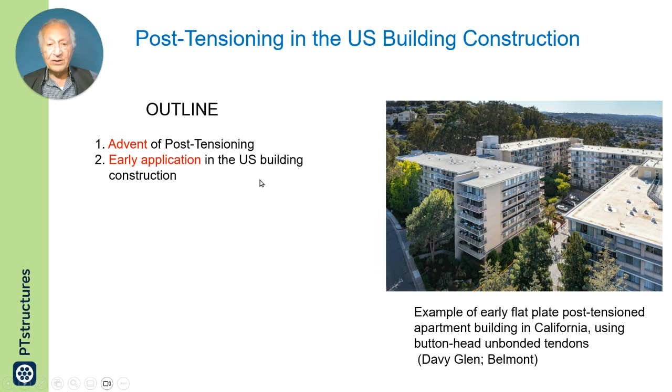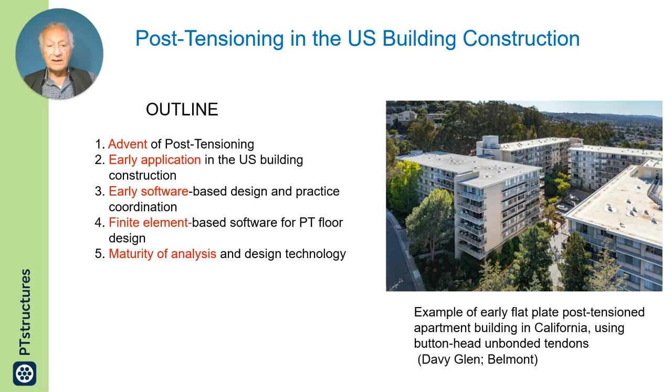Now I will start by giving you an outline of post-tensioning: the advent of post-tensioning worldwide, early application in the U.S. building construction, early software-based design, because I believe availability of software helped greatly in the growth of post-tensioning, then the finite element approach to design of post-tensioned structures, and the maturity in design and construction.

The advent of post-tensioning is attributed to Doehring in 1888, who obtained a patent in Germany for pre-stressing slabs and used metal wires. The objective at the time was control of cracking.

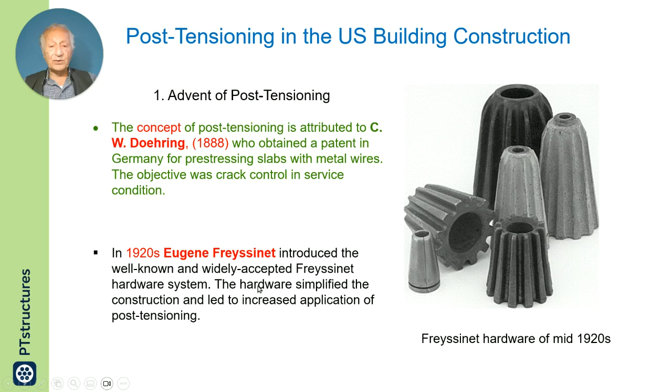In the 1920s, Freyssinet introduced the well-known and widely accepted Freyssinet hardware, shown partly on the right. The hardware simplified construction and led to increased application of post-tensioning.

Now, the design of post-tensioning was very different then. It is also very different today from the European style. Then the focus of application was in bridge construction, heavy structures, and the reduction of tension stresses, or avoiding tension stresses in the extreme fiber.

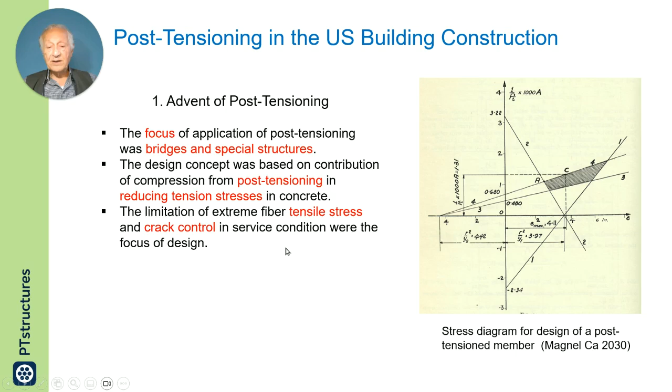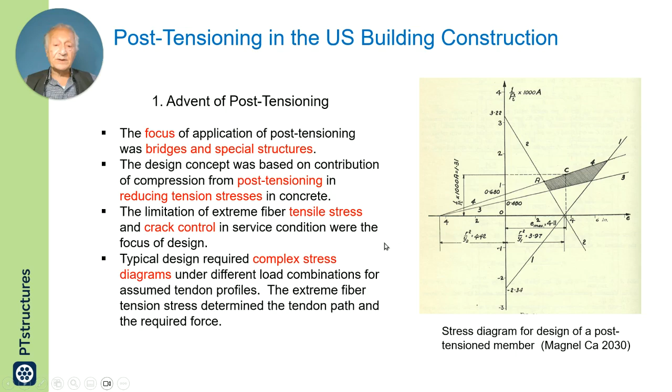Target was crack control. Extreme fiber stresses were calculated under different loading conditions and tendon profiles.

Early application in the US, however, is different. Not much happened, neither in concept nor in design procedure, between 1920 and the mid-1950s. In the mid-1950s, innovative building contractors in the US used pre-stressing strands and rods in flat slab construction to control deflection and cracking for thin concrete slabs.

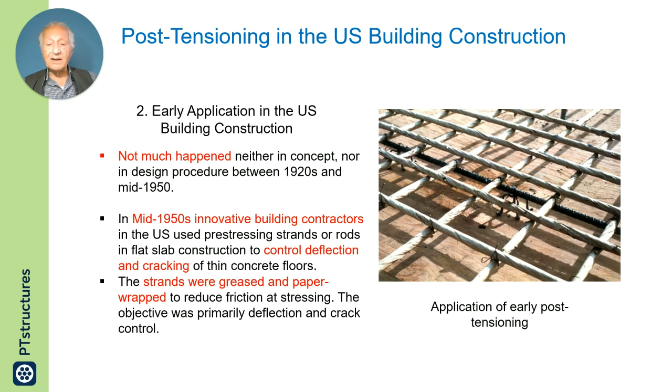The strands were greased and paper wrapped to reduce friction at stressing. The objective was deflection control, and to some extent cracking, but primarily deflection control. What you see on the right is an example of early construction where the tendon, the pre-stressing steel, is greased and paper wrapped.

The construction technology, in concept and application, widely differed from the European-based practice, very different. The US application was the introduction of unbonded construction technology, as opposed to the European practice, which was based on grouted post-tensioning.

In the European grouted system, the void between the pre-stressing steel and its conduit, subsequent to stressing, was filled with grout. The US practice was mostly focused on thin slabs, unlike the European practice, where heavy members were the target of post-tensioning.

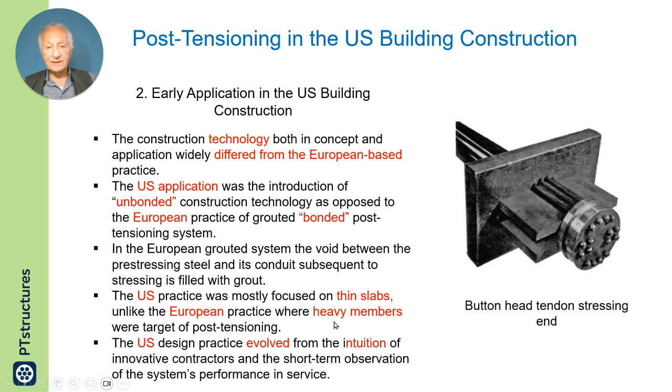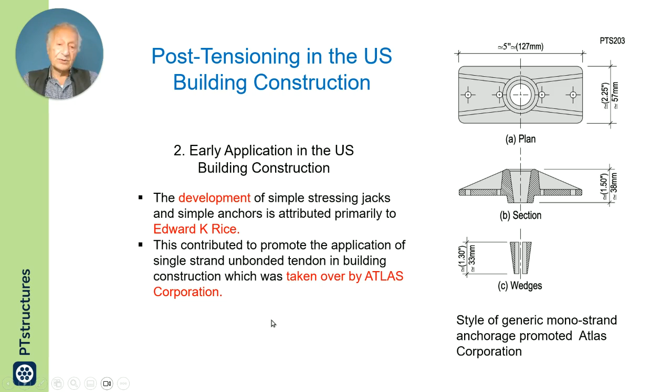The development of simple stressing jacks and simple anchors, as shown on the right, attributed to Edward Rice, helped simplify the construction and growth of its application. This contributed to promote the application of single-strand unbonded tendons. The design was later taken over by Atlas Corporation in California, that helped greatly in expansion and promotion.

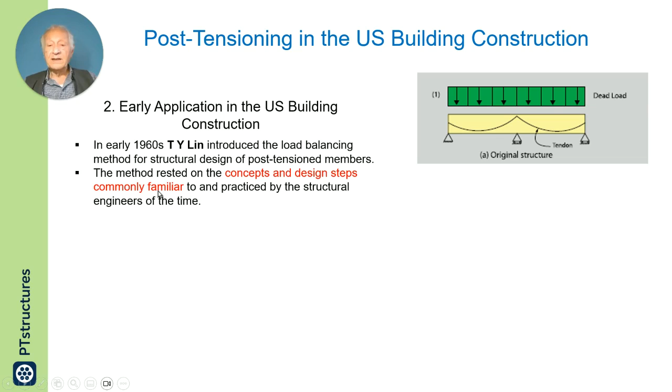In the early 60s, T.Y. Lin introduced the load balancing method for structural design of post-tensioned members. Now, the load balancing method, the concept and design of the structure, rested on commonly familiar concepts that structural engineers knew.

The load balancing method introduced by T.Y. Lin viewed the pre-stressing as an upward force, similar but opposing to the member's self-weight. If this is the post-tensioned member, this tendon was viewed to apply an upward force, as I have shown here, to counteract the weight of the structure, and that force obviously included downward components as well as axial forces.

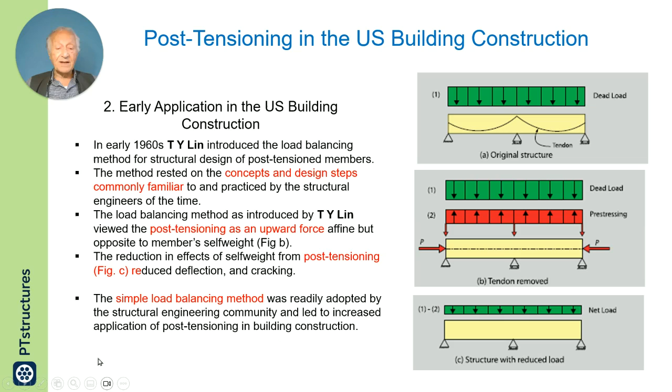The reduction in effects of self-weight from post-tensioning, as shown here, in effect the downward and upward result in a reduction of the load on the member from what it was before. So the reduction in effects of self-weight from load balancing reduced deflection and cracking. The simple load balancing method was readily adopted by the structural engineering community and led to increased application of post-tensioning in building construction.

In 1976, Clifford Freyermuth formed the Post-Tensioning Institute. He formalized the practice of post-tensioning in the US through many technical publications and educational seminars.

While the contribution of post-tensioning technology in Europe is fully acknowledged, it is recognized that the development of post-tensioning in the US for application in common building construction took place independently from the European concepts and practice. Here, I like to emphasize the word independently, both in concept and in practice.

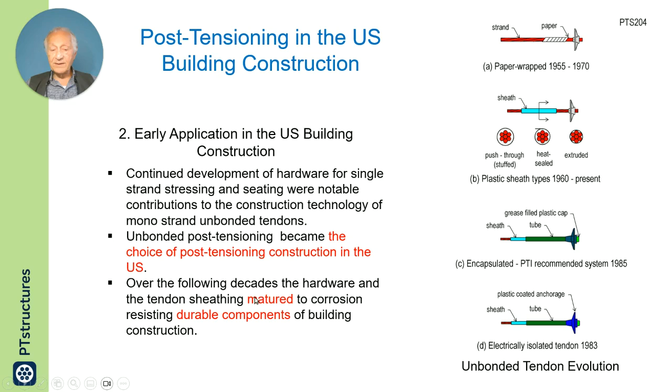Now, we are still talking about early applications. Continued developments of the hardware for single-strand stressing, from paper-wrapped all the way to what we have today, pushing through an enlarged hose, overlapping it, and extruded, all helped in development of the unbonded system into something durable and easy to construct. Over the following decades, the hardware matured into a durable and easy to use alternative.

Now, early designs in the 50s were based on the intuition of innovative contractors. I like to emphasize it was based on contractors' intuition. The objective was reduction in deflection and cracking. The practice was then fine-tuned by observation of its outcome. Much of this legacy of intuition-based practice is still the backbone of ACI 318 prescriptive design of concrete floors.

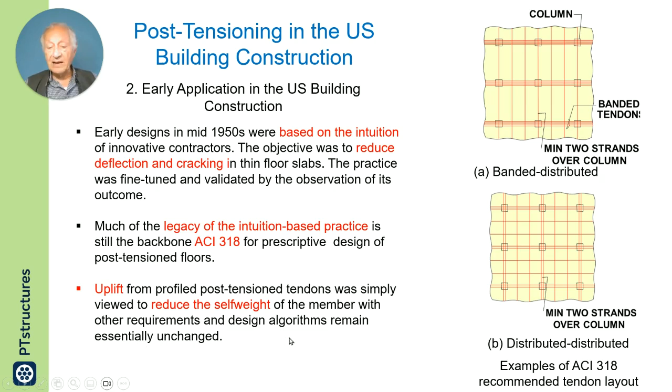Uplift from profiled post-tension tendons was simply viewed to reduce the self-weight of the member, with other requirements and design algorithms remaining essentially unchanged. We are talking about early practice in the US. The practice worked well, since the tendon amount and arrangement strictly followed proven examples of successful projects.

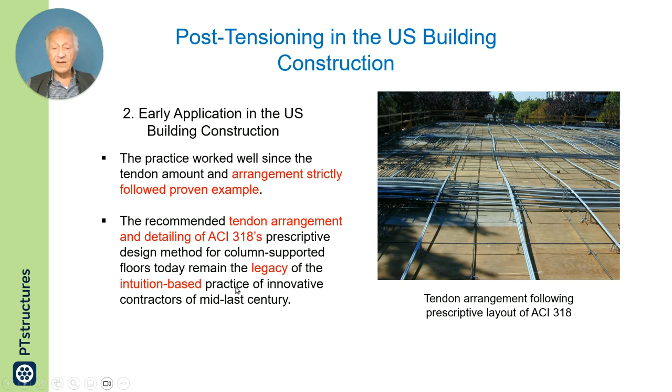The layout recommended was essentially similar to what I have here on the image. Here, groups banded in one direction and distributed in the other. The recommended tendon arrangement and the detailing of ACI 318 prescriptive design method for column-supported floors today remain the legacy of the intuition-based practice of innovative contractors of the past.

Now, what happened then? Let us start with the early 80s. When I started at VSL in California, there were already two commercially available software for design of post-tension floors. Both were based on modeling, analyzing, and designing design strips extracted from the floor at hand.

The computer we were using then was typically something like this example, Wang computers, which were different from the large computers, and consulting engineers could afford to have Wang computers and do their programming on them. That is, so to say, the first computer that I encountered to use and program when I started work at VSL.

Dissatisfied with underlying assumptions of the available software, I initiated the development of the software ADAPT, which at the time was jointly owned by VSL and myself. I was working at VSL, and there was a contract that the software developed by me would be owned by VSL and myself and would be jointly marketed.

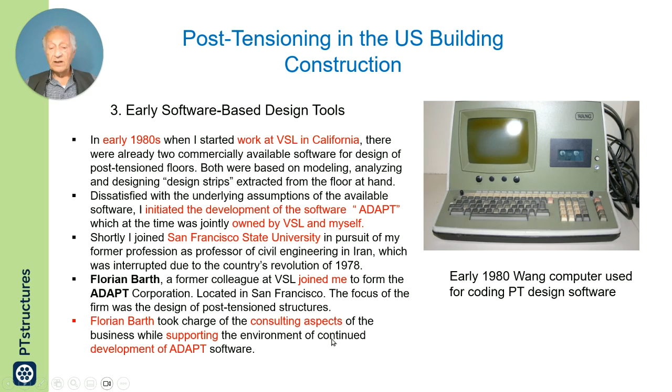The focus of the firm was the design of post-tension structures. Florian Barth took charge of the consulting aspects of the business while supporting the environment of continued development of ADAPT software.

In the late 1970s, the advent of computer-based design in consulting firms led to development and design of software for post-tension floors. It had already started in the late 1970s. Now, the software-based design in

the 1970s and early 80s, when I joined VSL, followed the established simple load balancing concept. The practice remained rooted in simple load balancing until the 80s, when the shortcomings in design technology were corrected and the introduction of the extended load balancing and its implementation in ADAPT became clear.

This is an image, on the top right, trying to highlight the practice based on simple load balancing. In simple load balancing, maybe the next slide will better explain.

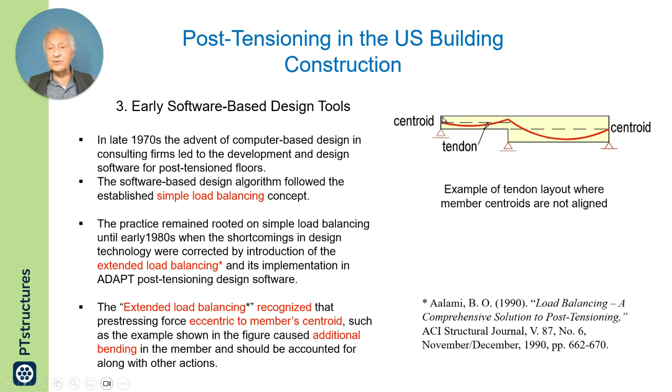Let us talk about early software-based tools. Around mid-1980s, a group of post-tensioning engineers were gathered in Denver to discuss and decide, among other topics, whether non-collinear tendon forces result in bending moment additive to those introduced from tendon uplift. What am I trying to convey? The engineers were gathered to decide whether, if the forces do not line up and are not collinear, does it create a bending moment or does it not? That was the question at the time.

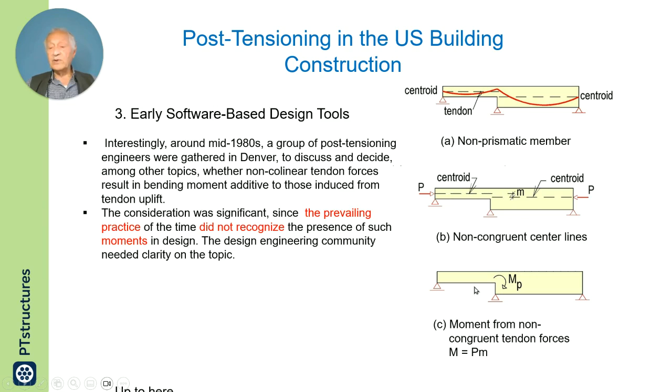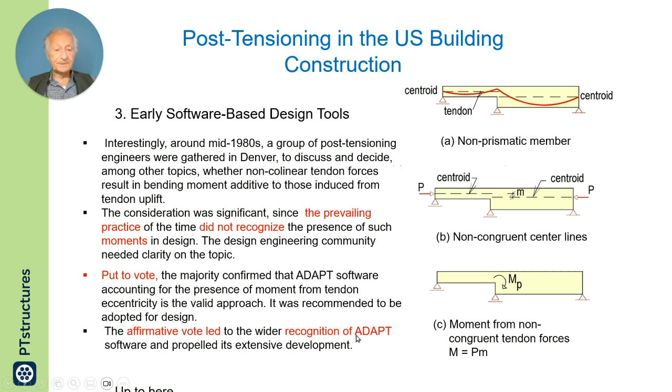The consideration was significant since prevailing practice of the time did not recognize the presence of moments. The design engineering community needed clarification on whether this force and this force, offset by M, will create a bending moment shown here. Interestingly, the question was put to vote. The majority confirmed that ADAPT software accounting for the presence of moment from tendon eccentricity is the valid approach. It was recommended to be adopted for design, confirming that Mp exists and is part of the actions to be accounted for. The affirmative vote led to the wider application of ADAPT software and propelled its extensive development.

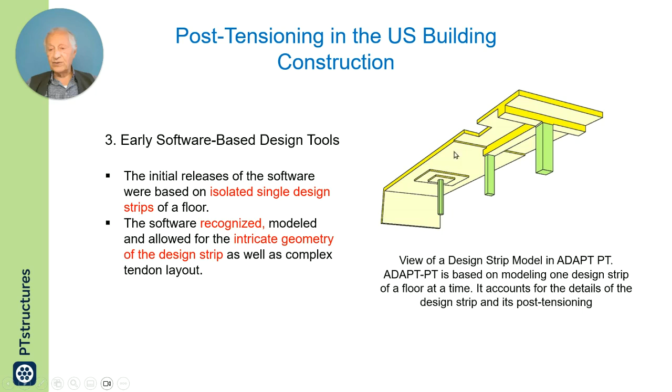Now let us talk a little bit about the early software-based design tools. The initial releases of the software were based on an isolated single design strip as shown here, taking a line of columns along with the tributary of the columns, the slab tributary, extracting it from the floor system and analyzing it separately. The software recognized, modeled, and allowed for the intricate geometry of the design strip as shown here. An example of it is on the right.

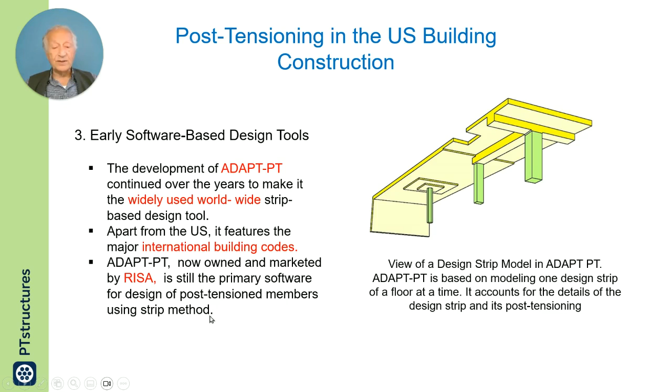The software is today available also. It recognizes all the complex changes and accounts for them in modeling and design. The development of ADAPT PT continued over the years to make it a widely used design tool worldwide for a single strip. Apart from the US, it features the major international building codes like the British, the European, the Canadian, Indian, Australian, and so on. ADAPT PT, now owned and marketed by RISA, is still the primary software for design of post-tensioned members using the strip method.

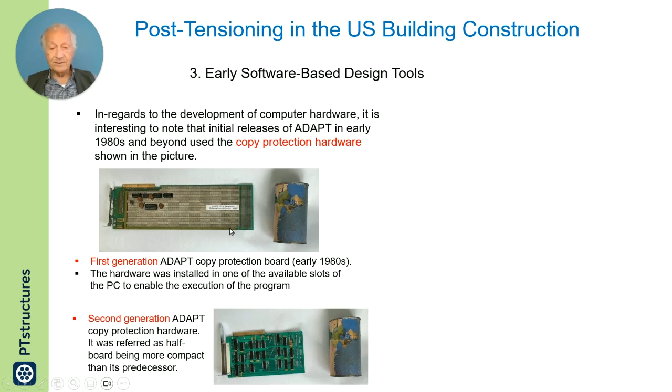Later developments made it simpler. This was the second generation, much smaller, called a half board, and this had to be installed, as shown at the bottom right of the image, in the box of the computer so that it could run the program. Later, with further developments, the next generation was something like this, small, which I have at the top right of the image.

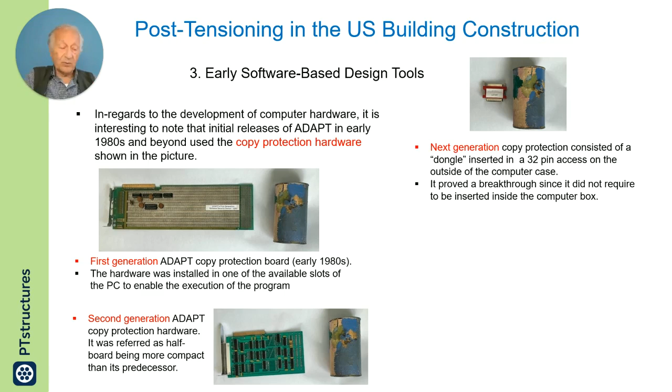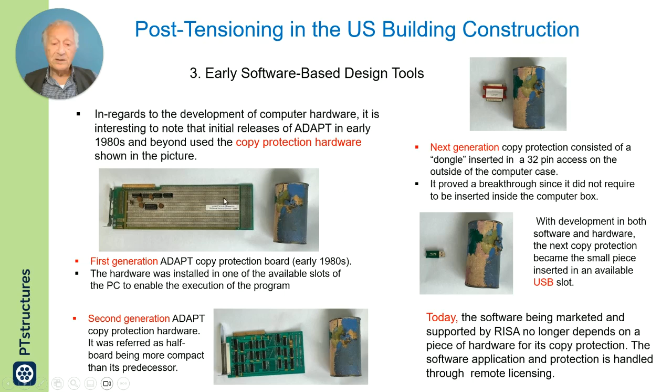This did not have to be inserted inside the computer. It could be attached to a port on the box outside, which was a great help. And obviously there has been a lot of development, and now we have the next generation, something very, very small for copy protection, which had to be inserted in the USB port. But now RISA has software licensing, so to say. Everything is done remotely through software, you don't have to go through all this, but it is interesting how much the protection has improved.

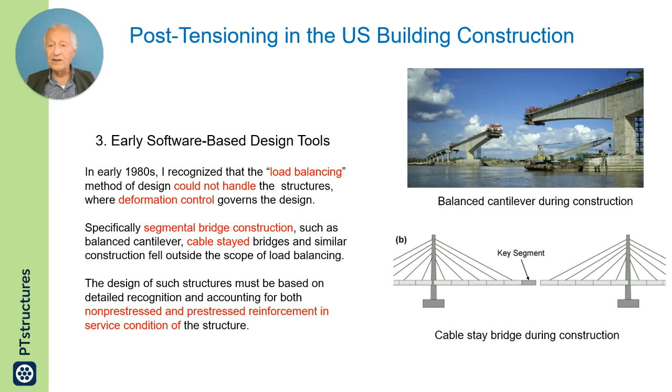So deformation during construction is critical. The design of such structures must be based on detailed recognition and accounting for both non-prestressed and prestressed reinforcement in service condition for deformation control, because rebar also is important in the amount of deformation in service condition.

To address the shortcoming, I developed the parallel post-tensioning analysis and design software ADAPT ABI for incremental construction and deformation control of post-tensioned members.

Where deformation control during construction is a major consideration, the presence of PT tendon in location and amount, as well as rebar in location and amount, are governing parameters to be accounted for.

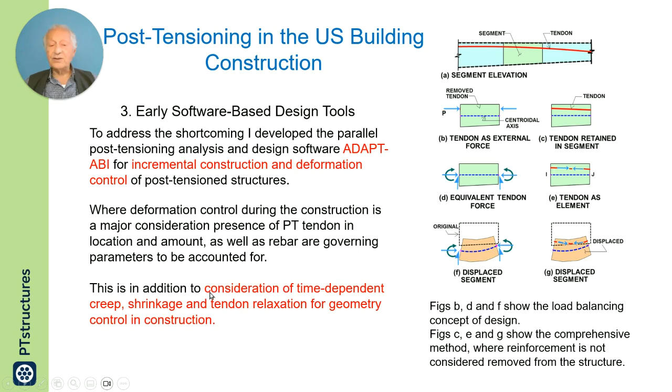This is in addition to consideration of time-dependent creep, shrinkage, and tendon relaxation, which all come into the picture for deformation control. This diagram is intended to illustrate the difference between what was done primarily based on load balancing or its concept, and the other scheme which I outlined in chapter 8, the basis of ADAPT ABI.

Here, if you take a piece out, the tendon is not removed, it is there. Whereas in load balancing, on the left, the tendon is no longer there—it is substituted by forces.

So as the member develops, the presence of both rebar and tendon can become impacted by the deformation, because deformation of the member deforms the rebar and the tendon, and that in effect changes the geometry, impacts the geometry. But the other approach is different: you substitute the force by the force of post-tensioning, by forces at the centroid, and the forces essentially remain unchanged.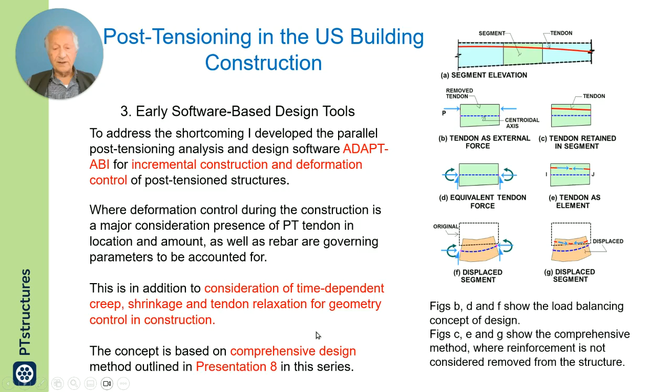Anyway, this is explained in presentation 8, in case you were interested to know more about it.

Then, at the same time, in the early 1980s, I met Alan Bommer on a post-tension project in Seattle. I found Alan Bommer an exceptionally bright and competent engineer, knowledgeable in post-tensioning concepts.

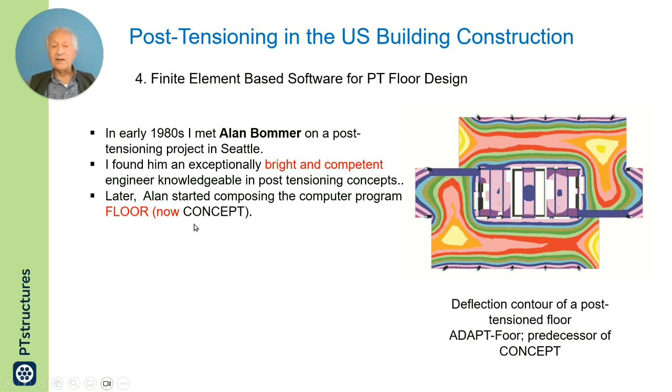Later, Alan started composing the computer program Floor, which is now Concept. Floor Concept is the first practical finite element program intended for the wide application design of concrete floor slabs, either conventionally reinforced or post-tensioned.

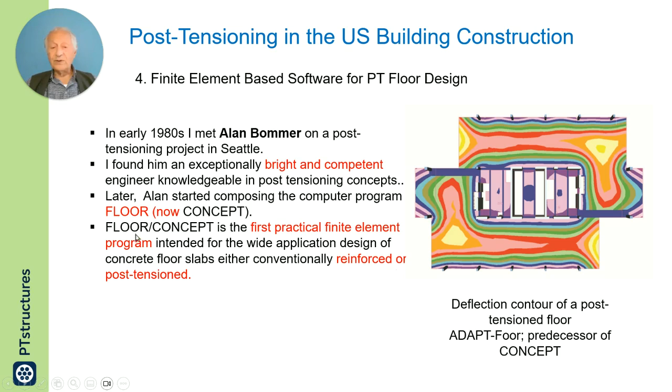Floor Concept is the first finite element program, and that has to be attributed to Alan Bommer, who initiated the first practical finite element program for design of concrete floor slabs, either conventionally reinforced or post-tensioned. Later, Alan and I formed a joint effort in the development and marketing of the program.

Here is an image from the program. The background of the program was based on the concept of considering tendons as an applied force in service condition and a resisting force in safety condition. That was the basis, which is an extension or a fashion of load balancing, again explained in presentation 8 in greater detail.

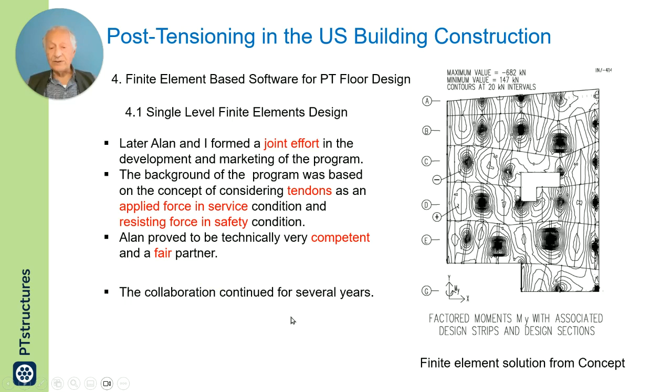Alan proved to be technically very competent and a fair partner. The collaboration continued for several years.

Nurturing a conceptual difference in treatment of post-tensioning in design, I then started the development of the finite element program ADAPT Builder for design of post-tensioned and conventionally reinforced floors. ADAPT Builder was coded on the concept of tendons as well as rebar being considered as resisting members in both in-service and safety state of members' response and design.

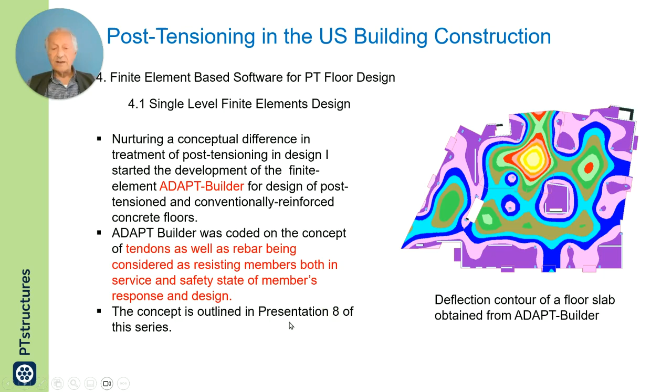The concept, again, I'm repeating myself, is outlined in presentation 8. The consideration is illustrated in the simplified view of a flat shell element used in the software. You have the flat shell element through which you have a number of tendon segments and a number of rebar segments.

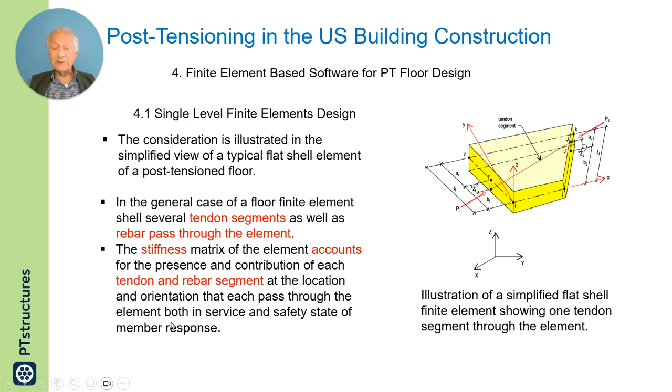In the general case of a floor finite element shell, there are several tendon segments as well as rebar segments that pass through the element. The stiffness matrix of the element accounts for the presence and contribution of each tendon and rebar segment at the location and orientation that each passes through the element, both in service and safety state of the floor.

The formulation recognizes that in service, the local impact of tendon force on the encasing concrete element is the friction and possibly lateral force between the tendon and the concrete segment, not the axial force.

Maybe here I have to pause a little bit. Maybe I have to come up with another presentation. Today, the intuition-based mechanics of solids rests on the belief that if a tendon is passing through an element, the force of the tendon will be transferred from the tendon, or the force of the tendon, to the segment.

Now, in reality, for service, when we talk about cracking, crack width, temperature cracking and shrinkage and so on, the force of the tendon is delivered to the structure at the anchors, at the edge of the slab or wherever the anchor is. The force of the tendon distributes into the structure based on the geometry of the concrete structure, where its openings are, where the beams are. So the pre-compression, which we talk about when it comes to crack control, is primarily the result of the force of a tendon applied at the anchor.

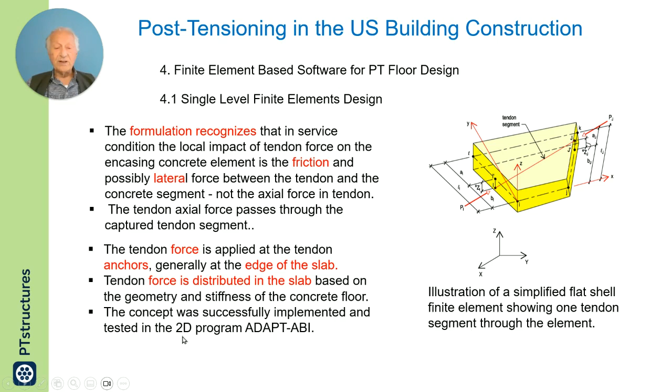The concept was successfully implemented and tested in the 2D program ADAPT ABI. The implementation of the concept for a flat plate is too complex.

Each slab shell element consisted of a combination of elements, a chunk of concrete that encases the concrete that is encased in the shell, rebar and tendon segments. Each component is recognized in its position and value and is expressed at the element nodes.

By the way, what I just said a little while ago was for service condition when we are talking about crack control. When it comes to safety, it's a different story. The contribution of tendon to safety is a different story. Also, if the tendon has curvature along its length, there will be forces which the tendon exerts in addition to its friction between the tendon and the member, arising from the curvature. So I just wanted to be clear that nothing is missed.

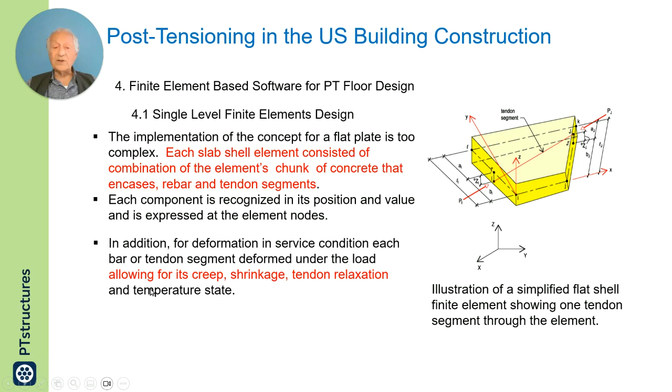In addition, for deformation in service condition, each bar or tendon segment deforms under the load with allowance of creep, shrinkage, and relaxation.

Alejandro Erasso, a talented and sharp engineer with strong conceptual understanding of mechanics, a classmate of my son Florian at Stanford University, developed the formulation and its implementation in the stiffness matrix of ADAPT Builder software, to include all those contributions in this flat shell and bring them all to the nodes so that the system stiffness matrix could be compiled and later mapped back to each individual element. That was a tough job, and Alejandro Erasso managed to handle it.

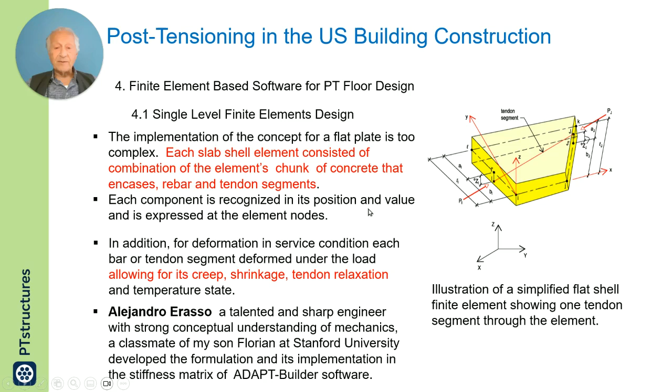Then Pawel Stankiewicz, also a strong structural engineer and software expert, led the successful coding and testing of the finite element concept adopted in ADAPT Builder software. Whatever Alejandro did, Pawel Stankiewicz, along with the help of others, coded it and tested it in the program to make sure that it all works.

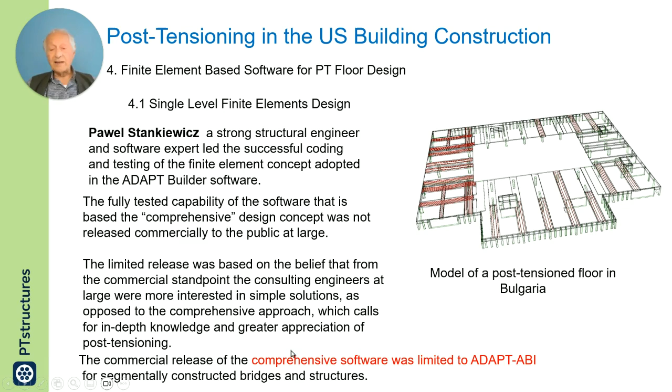The fully tested capability of the software, based on a comprehensive design concept, was not released commercially to the public at large. We had limited release, based on the belief that from the commercial standpoint, consulting engineers at large were more interested in simple solutions as opposed to the comprehensive approach, which calls for in-depth knowledge and greater appreciation of post-tensioning technology. The commercial release of the comprehensive software was limited to ADAPT ABI, which was used successfully in many bridge constructions, segmental bridges, and cable-stayed bridges.

Now I want to draw your attention to a couple of other items which I think are significant in analysis but are not apparent to the end users. These features are not apparent to the end users, but are critical to the authenticity and accuracy of the software outcome.

Now, the ADAPT Builder model of analysis is based on the physical geometry of the structure, not the prevailing analytical geometry. Now, what do I mean? If this is the physical geometry, typically in the background, the software uses this model to represent this. There is a node here which is common between the two. To keep common nodes, there is a change in geometry. Adapt does it like this.

In other words, it keeps the physical geometry exactly as is in the real structure, so the nodes do not match. This has to be taken care of in the formulation for the handshake between the force here and here. The reason the nodes here are common is for the handshake of the force.

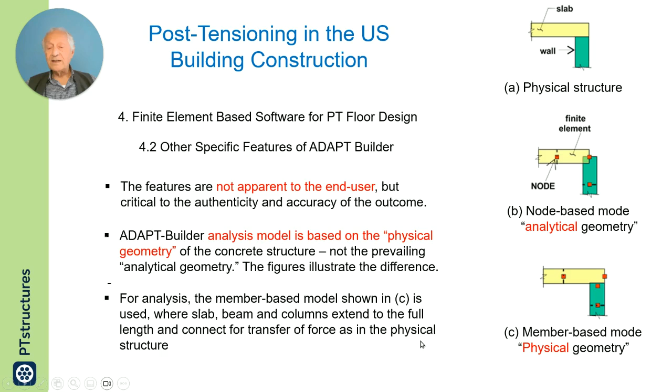Now, in order to account for the presence of each tendon and rebar, the model accounts for the presence of each tendon and rebar and its contribution to deflection, to cracking, to strength.

In order to account for the presence of each tendon and rebar, in the amount and the location where each occurs, the structural system was expressed and solved in a virtual analysis space. The solution of this was carried out here.

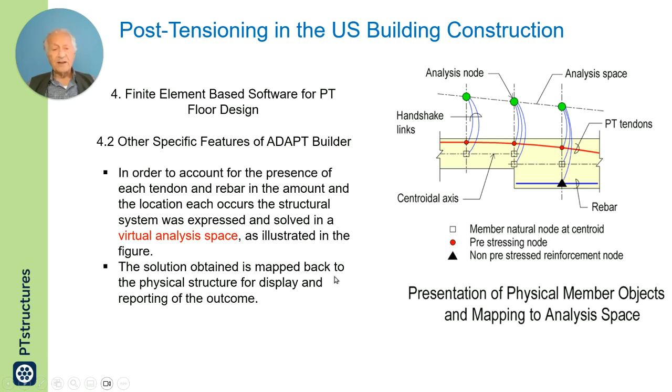The nodes in the analysis space are here, and each one of them had its contribution transferred to here for analysis. After the analysis was completed, the actions and the deformation were mapped back to the real location and reported to the user, mapped back to the physical structure for display and reporting.

Now, all that was analysis. But as far as visual goes, Nicolas Mangon designed the architecture and wrote the code for the visual creation and display of ADAPT Builder.

As far as the creation side of the model is concerned, like what you see on the right, Nicolas did all the work, including the presentation of each tendon and each rebar in the model from the creation of the model.

But once it comes to creation, it is transferred into a system matrix. Once it comes to the system matrix and is solved, the question becomes: how to get the results out in the manner and shape that the end user wants. That is where somebody else came into the picture — that is what Florian Aalami did, which I'll talk about later.

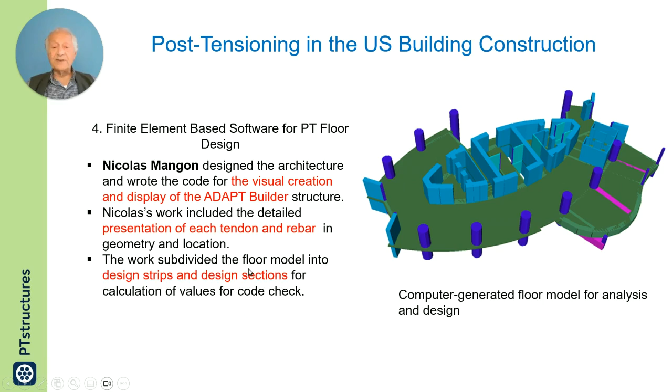Nicolas's work also included the breakdown of the model into design strips. The work subdivided the floor model into design strips and design sections.

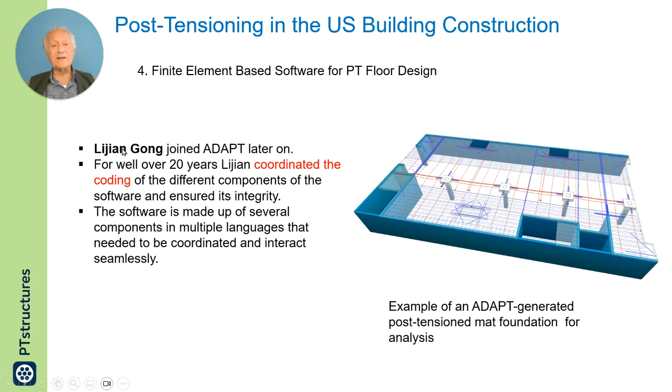Lijian Gong joined ADAPT later, and for over 20 years coordinated the coding of the different components of the program to make sure they all speak together and work together to conclude with a solution. That was not simple, because the software is made up of several components in multiple languages that needed coordination and smooth interaction. For over 20 years, Lijian did all that work very efficiently and very successfully.

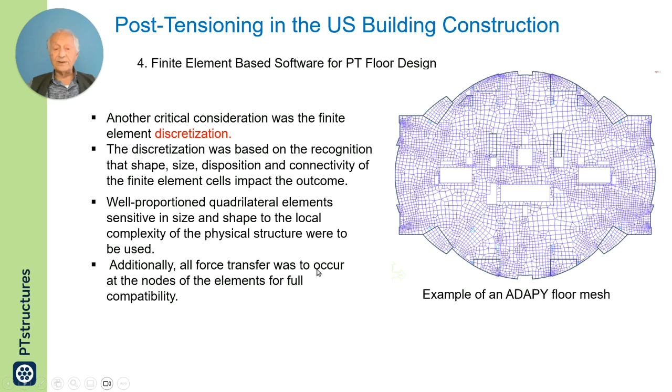Well-proportioned quadrilateral elements are sensitive in size and shape to the local complexity of the structure. Wherever there is complexity in geometry, the elements have to be accordingly adjusted. Additionally, all force transfer was to occur at the nodes of the elements for full compatibility.

Starting from a basic mesh generation formulation, Shahram Taghavi, former teaching assistant of my daughter Shirin in a structural engineering course at Stanford University, joined ADAPT and developed the organic refined meshing of the structure, which is sensitive to the geometrical intricacies of the physical structure.

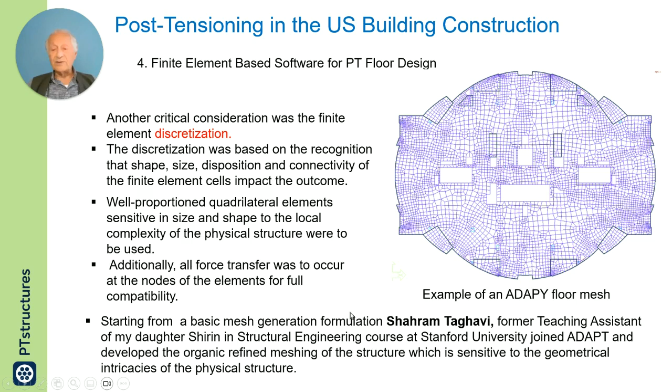Shahram managed to create this irrespective of the complexity of the geometry — floor steps up and down, openings, changes in thickness, beams — recognizing beams and creating a proper mesh for beam where there was a slab, proper mesh for slab, and putting it all correctly together. He did a very good job.

In addition, local cracking, crack width, and post-crack deflection are among design considerations of the European and other international codes which had to be taken into account. In ACI we have a limit on extreme fiber tension stress that you do not exceed. But in EC2 and other codes, it is permissible to allow cracking provided you control the width of the crack, based on the application of the floor.

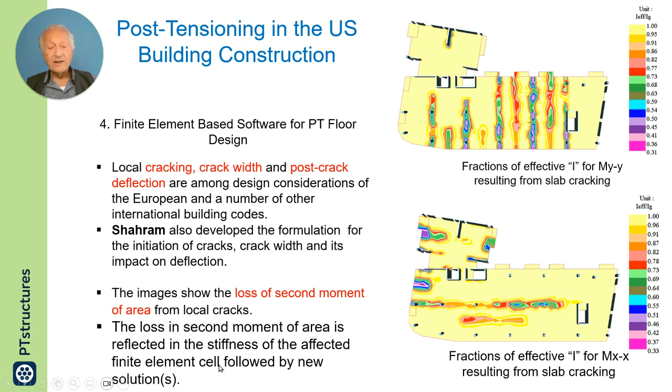Shahram also developed a formulation for the initiation of cracks, crack width, and its impact on deflection. The images show the loss of second moment of area from local cracks. For example, the moment MYY results in loss of second moment of area in the amounts shown. Yellow means no loss, and here I have a maximum 31% loss, where this color appears in one direction and then in the other. This loss in local stiffness results in increased deflection as well as cracking and the crack width calculation. So the loss in second moment of area is reflected in the stiffness of the affected finite element cell, followed by a new solution.

Coming back now to what happens after the system matrix is solved and you get results. What you get is just deformations, but to convert that into user-required information, such as capacity, demand, how much reinforcement, and where it meets code or not, is a totally different story requiring a lot of information extracted from the finite elements, plus knowledge of the code to know where an item is satisfied or not.

There, Florian Aalami, my son, focused on extraction, post-processing and presentation of the analysis and design outcome from the raw finite element results, in a format that best suits the end user engineer to complete the design.

As an example, at each design section, these green lines are the support line, and these other green lines are the design sections. At each design section, using the user-defined reinforcement if any, since sometimes users put a mesh that is taken into account in the design, and added required reinforcement by this software, the software displays the demand values. These are the demand values, demand in negative moment, demand in positive moment.

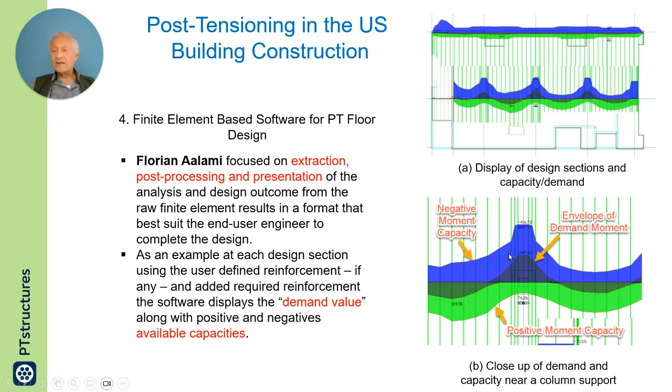Let me start. The black is the demand based on the geometry and the load. This is the demand. The program shows the demand along with the capacity from the existing post-tensioning, computed post-tensioning, and existing rebar. So where the demand, shown in black, falls outside the capacity, it shows in a different color and then rebar is added.

In addition, Florian led the graphical presentation team beyond the prevailing practice and developed Visicon. Visicon displays in 3D the Adapt Builder analysis model with authentic details of its physical features, including pre-stressing.

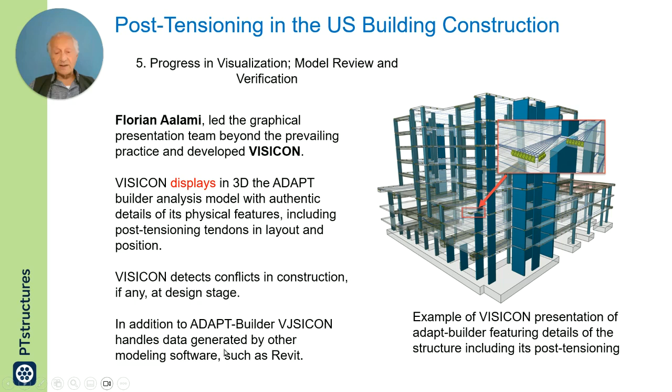Visicon detects conflict in construction, if any, at design stage. It can also display the post-tensioning and physical features and construction steps of software models created by other software. In addition to Adapt Builder, Visicon handles data generated by other modeling software.

As expectations from authentic modeling and analysis results shifted from computer-based visualization to cloud-based computing, Florian led the creation of TrueBuild, which is cloud-based modeling. TrueBuild displays the construction steps and details of a building construction created by Adapt Builder or other software, along with analysis and design results. Let us not forget, this is a post-tensioning presentation, so TrueBuild does take authentically the presence of post-tensioning in location, in amount, and in display.

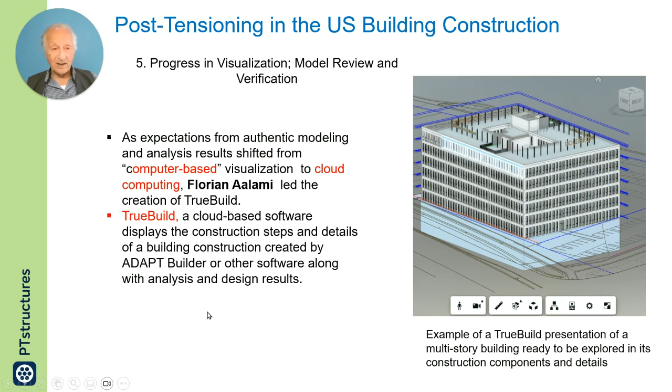In 2013, the American Concrete Institute, ACI, recognized the Adapt contribution as outstanding engineering development work to concrete design and construction by conferring to Adapt the Charles Whitney Award. This recognition really goes to the 100-plus people who helped over 40 years to create this software.

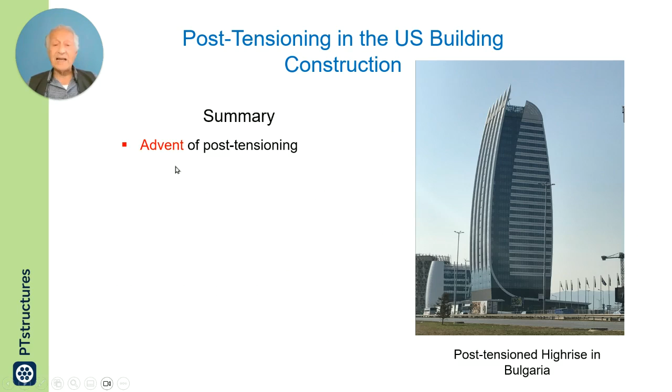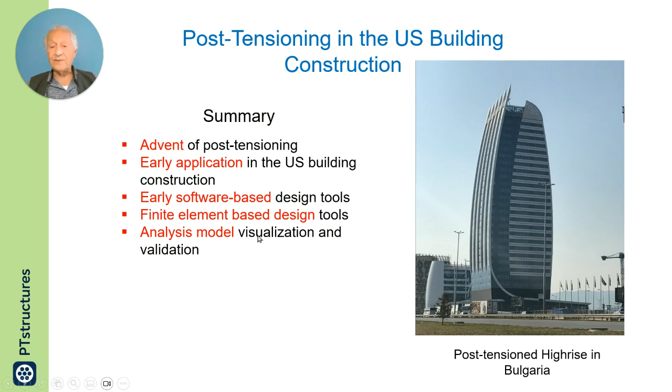So, in summary, I talked about the advent of post-tensioning, early application in the US, early software-based design, finite element-based analysis models, visual validation with Visicon, and then recognition. Thank you for listening. Additional information you can find in this book.